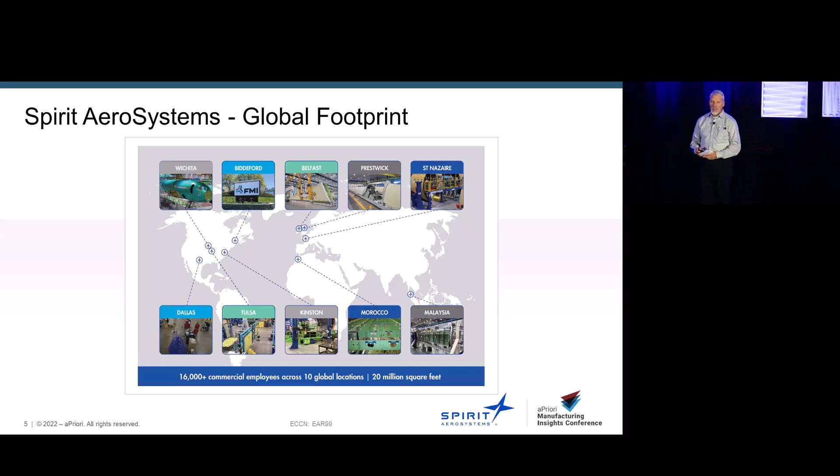That kind of stuff is where our company spends its time in going green. I'm very excited because the aPriori software will let us actually look at our parts like we saw today and yesterday, and that'll be a great boon for us to have tools that allow us to evaluate and improve on that.

One other thing I'd like to mention, we do a lot of different research and development, but aPriori falls in our product development software tools. That is a way for us to do stuff better, faster, cheaper, like everybody's trying to do.

It also helps us with accelerated learning curves. If you've studied cost curves or learning curves of any product, the very first one you make is a million dollars, and then you drive it down to where it's a reasonable cost that people will pay so you can make a profit. Trying to simulate both the design and build aspects, including the supply chain functions, will allow you to enter that curve at a much lower point and have a program baseline cost that'll be a lot better for your profit.

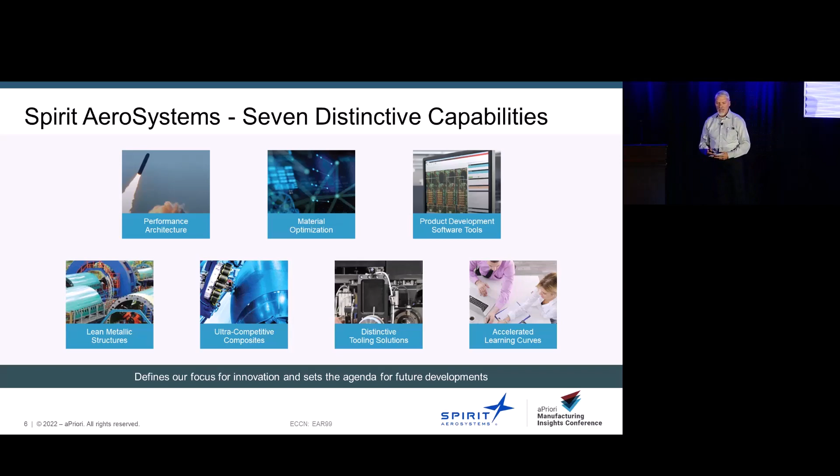Okay, so that's enough for me. We're going to switch to Dave.

Good afternoon. So what we're going to talk about today is a project we worked on a couple of years ago, and some of the success and how we proceeded about that. We've been working with aPriori since 2016, using it in the engineering design-to-cost arena. So the engineering team, we took the lead in using aPriori within the company, and we became the experts.

In 2019, we started working with our internal fabrication team, specifically with what we called our third-party fabrication. They're the part of the business that's looking to bring in parts from other suppliers or other companies for us to build, so a build-to-print operation. We have a lot of machining capability.

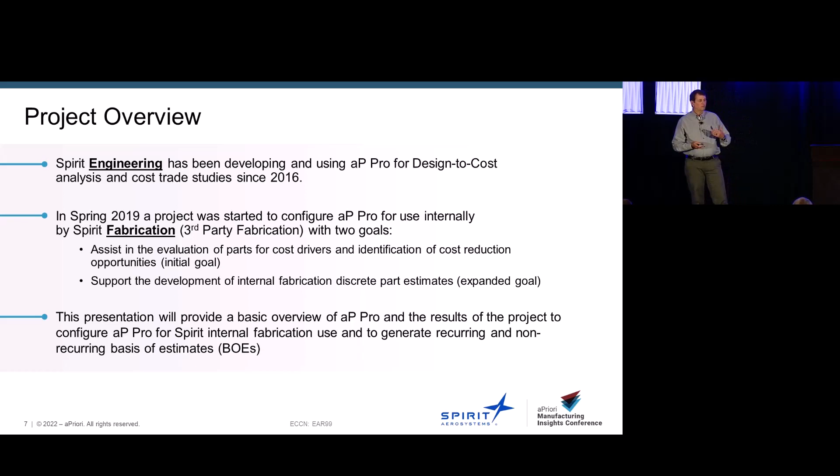We have a lot of excess capacity, so we want to use that to generate revenue. Two goals in that process were to assist in the evaluation of parts for cost driver identification and cost reduction opportunities, taking what we learned from engineering design to cost and applying it to the fabrication team to support a new business. We also wanted to help with estimates—when a company asks what it would cost to build their part in our factory, we wanted to help with those estimates. So this presentation provides an overview of the fabrication side and what we've learned.

A little bit of information—you've seen this in others, but what is aPriori? It's the product cost management software. It helps us estimate costs quickly and accurately in our factory. Why are we using it? For consistency—a lot of our processes today are still very much manual.

It helps us leverage 3D CAD models. So as a customer comes in with models they want to estimate, we don't have to have an estimator sitting there opening every model and querying it for features. The digital factory represents our capabilities, so again, we understand how that part would be made. And lastly, that design for manufacturability or design to cost would help distinguish Spirit from other suppliers.

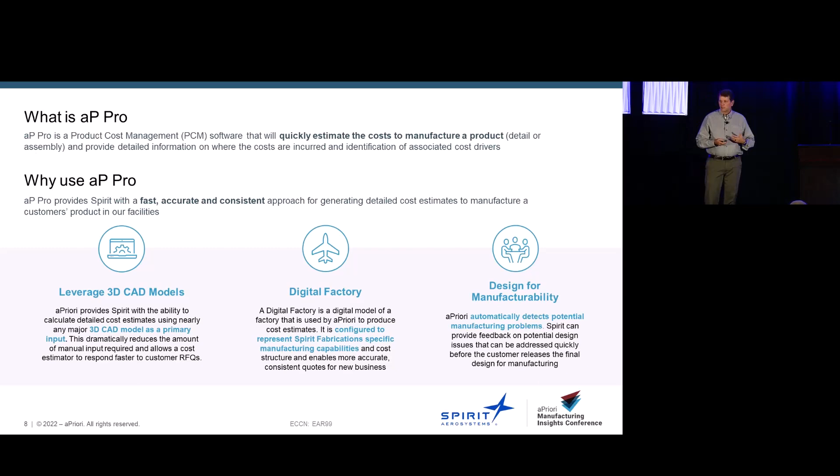The engineering design to cost process is represented on the slide. The basic process: we took the CAD models, ran them through aPriori, and set up a process for how we evaluate those models. For engineering, this was set up more for directional cost—does design A cost more than design B? Does changing material, product, or form influence cost adversely? Or what tolerances or finishes might increase cost? It was very much high level, and it was configured not so much for internal use or internal fabrication, but more from an external supplier's perspective.

So we wanted to take what we had learned and apply it to our internal fabrication. Part of the question was, okay, where do we start? We knew we could apply the design to cost approach to a customer's models, and that would distinguish us from other suppliers bidding on the same product. The other thing was, we knew aPriori created a lot of data—it's in spreadsheet reports, and you can see it when you dig into the part details tabs. So there's a lot of data behind the scenes, but how do we use that data to help with estimating and the fabrication process? That was the challenge before.

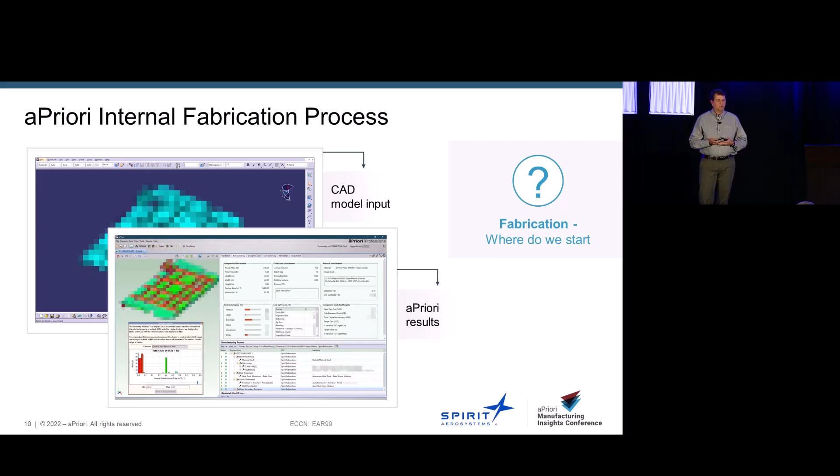So the engineering team that implemented it before then transitioned to helping the fabrication team figure out how we could use this. This is a high-level flow of an estimate or request for proposal coming into our fabrication team, and what steps it goes through. We needed to look at where aPriori fits into this process. We got an idea of what the flow was, looked at what's going on, and the obvious place it fits in is where it says supporting team members develop estimates—that's really a logical place for aPriori. The functions you see below are the different organizations that submit inputs to create an estimate, so we had to understand what kind of inputs they're creating.

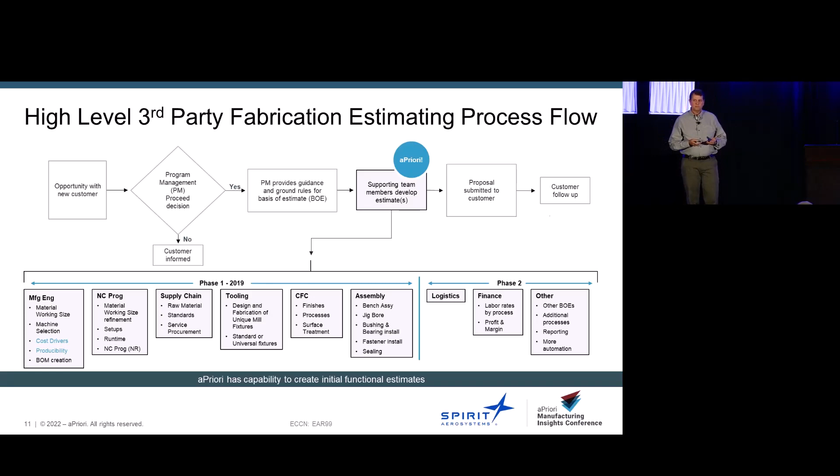The manufacturing engineer has to come up with the initial material working size, and based on that, our supply chain can determine how much material we have to buy. It's a very sequential, manual process as you move left to right, with a lot of handoffs. Our thought was, if we understand how they're doing their business, we could probably automate this. And frankly, the manufacturing engineer, who is at the front of this process, could use aPriori to generate a lot of this data and these estimates up front, with others becoming downstream reviewers who either validate it or make changes.

So the next step was to dig into these different functions—specifically the machine fabrication unit, the hard tooling, and the NC program, which is where we spent a lot of our time.

There's a lot of detail there. We had to configure the aPriori configuration to be more specific to an internal Spirit fabrication, not so much the engineering design case usage. So we looked at a lot of the data, a lot of the ways they're doing things, and we started configuring the aPriori.

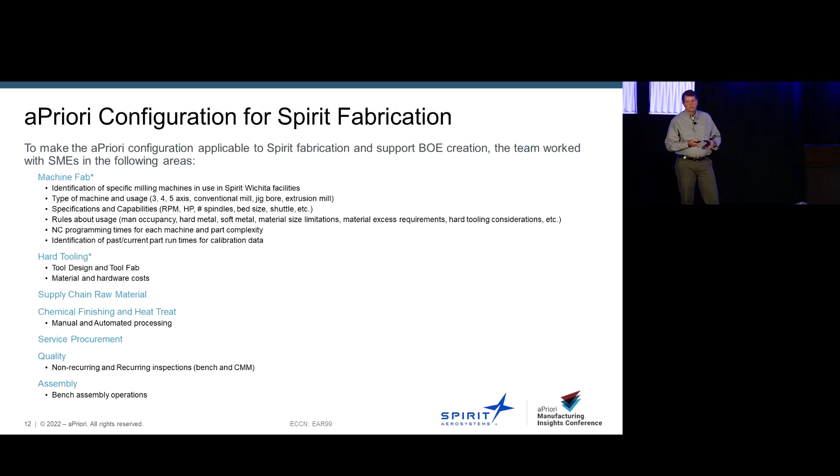The other organizations there that you see is the supply chain, chemical finish, heat treat. We also gathered data from them, but really the bulk of the work was done in those, the tooling, fab, and NC programming. So as we got into some of those, it became evident in the tooling world we needed to understand more, needed to do a deeper dive.

Some of our machines require NC fixtures, tooling fixtures, while other machines, the way we run the parts, we don't use a milling fixture at all. The part is the fixture. So we either design a fixture, hold the part with the fixture, or we buy excess material and use extra material around the part to use that as a fixture.

So what became evident there was we needed a better way to estimate not only the tooling cost, but when you do and don't use the tooling. So we did some digging into past tooling estimates. We created a hard tooling parametric estimator, which is represented there by a spreadsheet kind of inlay on the left.

Basically that takes in considerations about how big the part is, what size and what the material is, and it's a parametric estimator. The example there of the picture is basically minimum excess material around the part. Conversely, if the part's going to be run on a machine that doesn't require that hard tooling and it can use the extra material, then simply you're just buying excess material, which is a cost in itself, and you use that for your fixture.

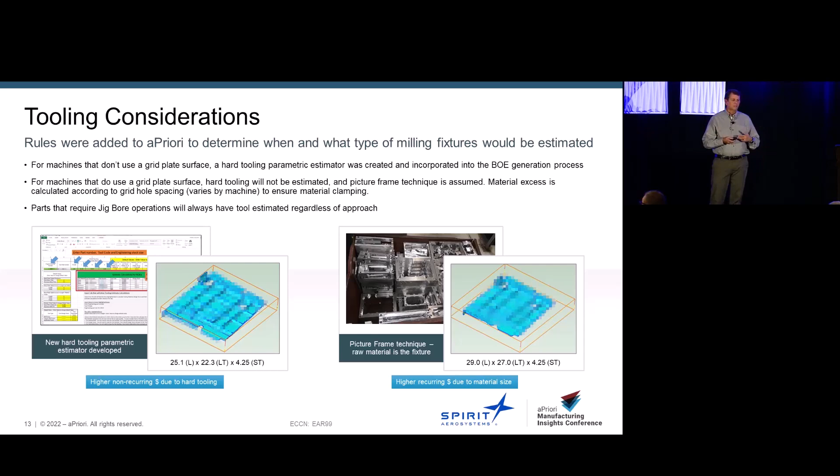So the trade-off is an initial non-recurring investment in tooling or a recurring investment in raw material. So that becomes part of the trades that the fabrication team can use.

Another thing we got into was the chemical finishing and heat treats and any surface treatments. So in support of the third-party fabrication, they had an existing tool that they used to help estimate these kinds of processes as they ran through the process. Again, totally separate from other activities, so a person had to go in there and input each part line by line, either copy and paste or using drop-down menus, putting things in there such as nomenclature, materials, all the things that could already exist in aPriori.

So we took this estimator that they had, we configured it for implementation into aPriori, and what you see on the right side is the new aPriori selections.

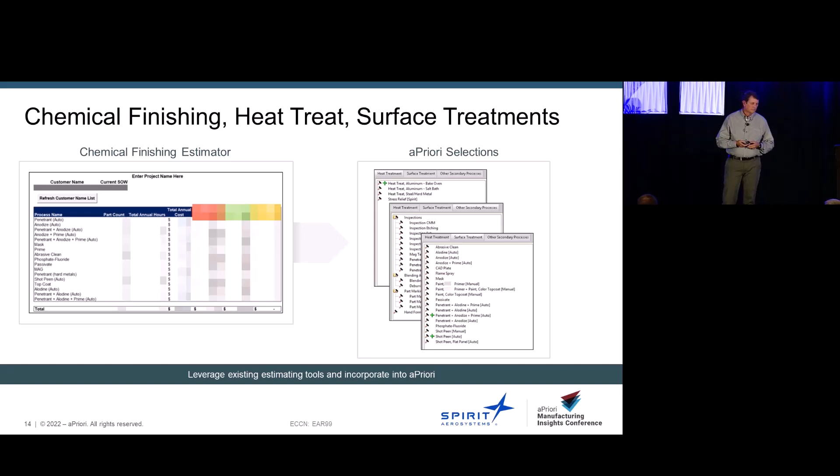So we did all the configuration, and we kind of had what we wanted, but now the question is, what do you do with all the data, or what is all the data? So the existing spreadsheet reports in aPriori had some functionality that was good for us—part cost report, details, tooling, et cetera—but it really didn't expose all the data we wanted.

So we worked with our expert service consultant. We had them create a data report. We just called it All Data, real creative name, but it's a dump of data from aPriori. In this case, that spreadsheet there's 13 parts there, but that generates like 220,000 cells of data. It's not all unique, so there's a lot of duplicate data.

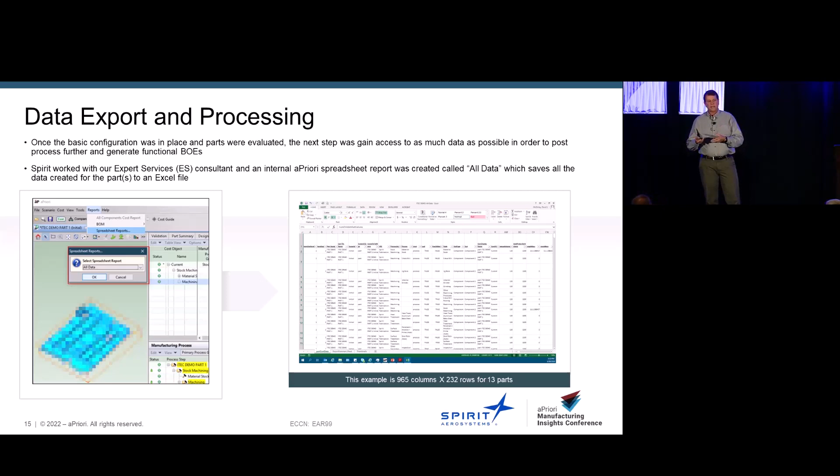So now you have to parse through that and figure out what you want. But the idea was, give us all the data you can, and we're going to post-process it by selecting what we want and what's relevant to our estimates and our needs.

So to post-process, well, we wanted something somewhat simple, so we created what we called the BOE Generator. It's just a simple GUI, Excel-based. It gives the person that's running this estimate, so in this case the manufacturing engineer, a front-end interface to input Excel files from the folder inputs, give the project a name, information about how many quantities of parts we're talking about.

The code or the macros behind it reconciles the aPriori quantities to the total airplane quantities, because there's left and rights and opposites and a lot of things. So if you get the quantities right in aPriori for what you're costing, this tool then reconciles that to give you total quantities of everything you need. The input here is the user could generate one BOE if they only wanted a manufacturing engineering estimate or an NC programming, or they could say, give me all the BOEs—everything that would be required as part of that function.

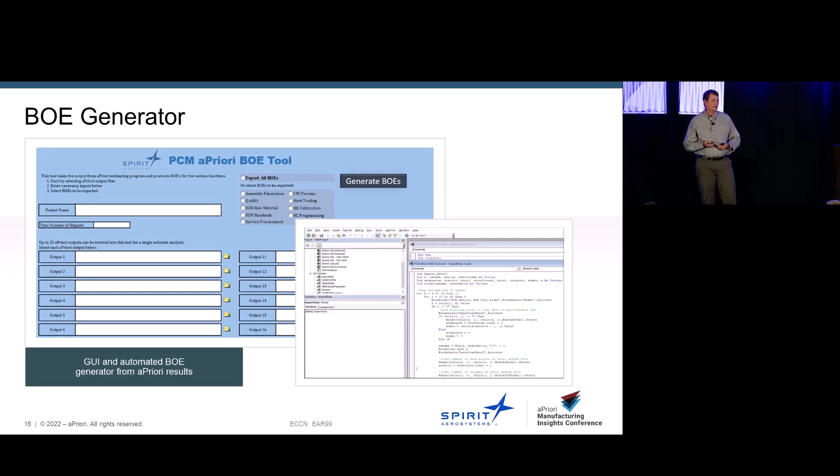The output is a standard BOE form that we use, and the BOE tool then generates the spreadsheet with all the relevant information. It provides tabs on supporting data, taking all that aPriori data and bringing it back into a spreadsheet that now is a live spreadsheet.

The intent was this would be a place where downstream functions could say yes, I agree with this data, or I understand it but maybe it's not quite what I wanted. So they can go into the supporting data tab, change or make any assumptions they need, and that gets reflected on the recurring estimate. It also does non-recurring estimates as well.

The idea here was this becomes now the document. aPriori was a means to get to this in an automated manner, but we didn't need everybody to be an aPriori expert or run the tool. We just needed to get something in front of them with a good understanding of how it got there, and then they make any changes in the spreadsheet, and it updates in the summary.

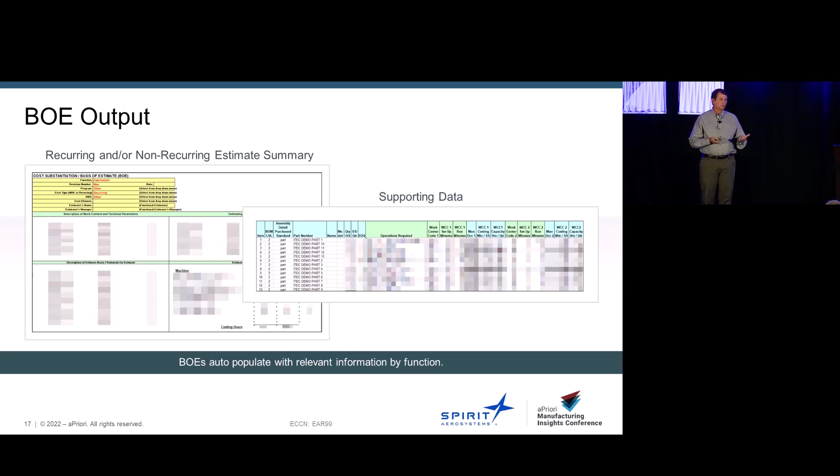Now, if they wanted to go back and rerun the scenarios in aPriori, they certainly could, and that would provide a hard link between the spreadsheet result and the aPriori database.

So in summary, some of the things we accomplished with this project: we created a digital factory for our internal fabrication, specifically to support third-party fabrication estimates, not to run our own business but to do work for other companies. And we created a hard tooling parametric estimator, which I think will be helpful going forward.

Maybe the biggest thing out of this is the efficiency. We created a process to generate a time-based recurring and non-recurring estimation that can be completed in hours as opposed to days. We took a lot of the manual handoffs and manual communications and turned that into an automated process.

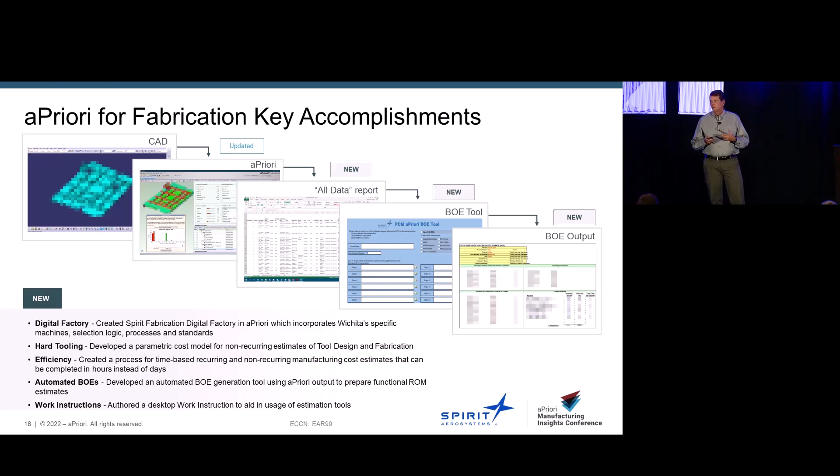The automated BOEs populate, functional organizations can look at that, and then they can sign off if they agree with it, or they can make changes. We also created work instructions, giving the team members information about how to use the tools we created and how to manipulate them if needed.

Going forward, we did have disruption due to COVID, like a lot of companies, and other industry issues, so there are still things we want to do. We'd like more automation. I'd really like to see the process initiated from a GUI from start to finish.

The hard tooling estimator we created got pretty involved, so we didn't actually get that incorporated into aPriori like we did the chemical finishing piece. When we run the GUI today for the BOE creator, it goes and grabs that hard tooling parametric and incorporates it into the results. So it's still automated, but it's not something in aPriori yet.

We'd like to get additional organizations included, some of them like quality and logistics, and some others. We have the data, they're just not into the tool yet. So they're still part of the outside of the BOE generation.

We'd like to have more logic to identify optimal machines, time-based, and rank those. Today when our manufacturing engineer is selecting a machine, he already kind of knows what that machine's capability is. But why not have a list of machines that says, even though this was your first choice, here's your second best choice, your third best choice, et cetera.

This is right now Wichita specific. We have machining capabilities in other locations, it could be Belfast, Tulsa, or other places. So we'd like to bring in machines from those other sites. Of course, you always want to make sure your outputs are consistent, so process and setup options and calibrations all need to be reviewed, especially as the aPriori machining logic improves. We want to make sure we're still in tune with that.